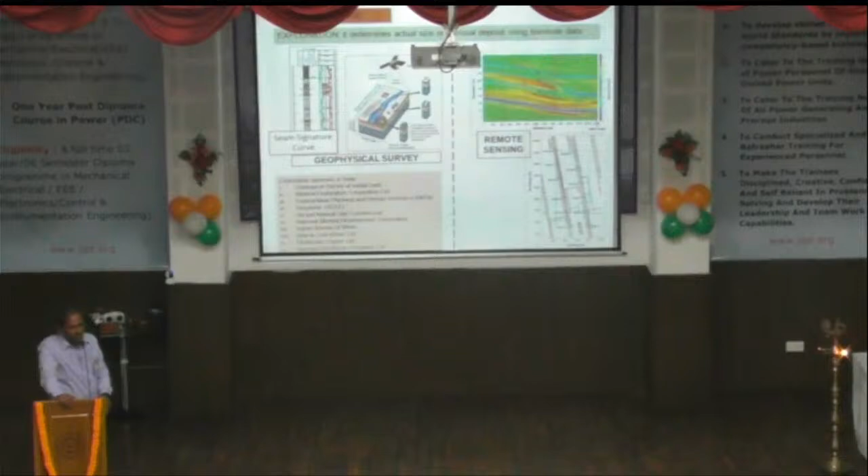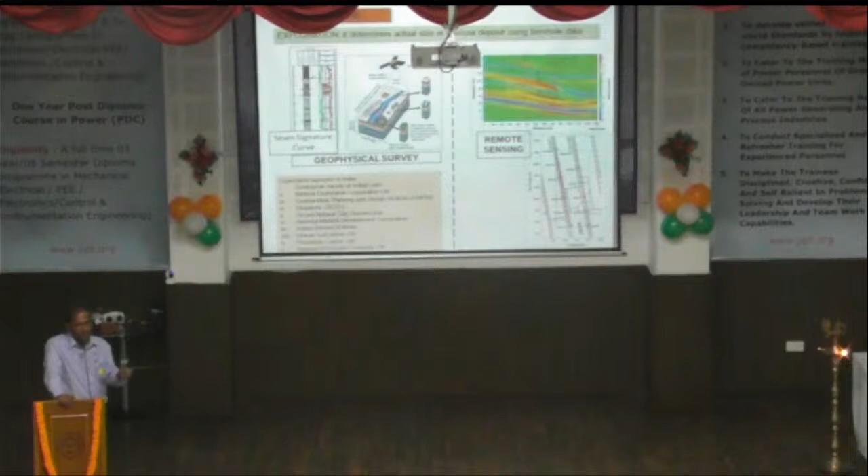So coming to this slide, the first thing is remote sensing, through which the potential of any mineral nearby or in an area is depicted or analyzed. After that, we go for full exploration, that is by borehole - we go for drilling, we remove the cores, and then we analyze the different cores to see what type of rock we are getting at what depth. I'll show some real pictures which we have taken recently at our mine.

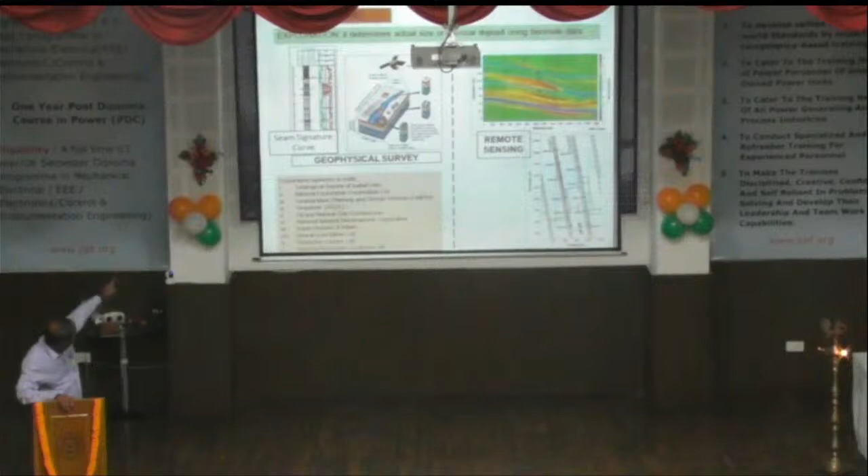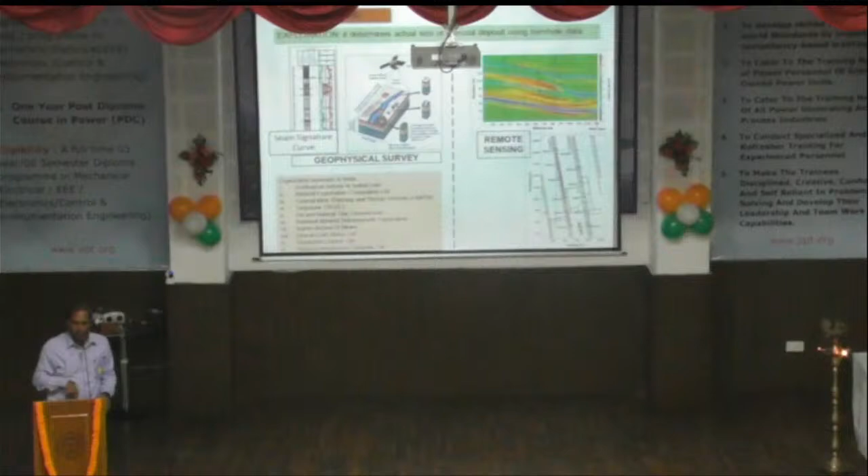This first thing, which I've called signature curve, is a modern technology where, just like our signature, with the geo probe, there are probes which we insert inside the bore hole, and we get the photograph, the geophysical and physico-mechanical properties of the rock through different lasers and other things, just like an X-ray inside the borehole.

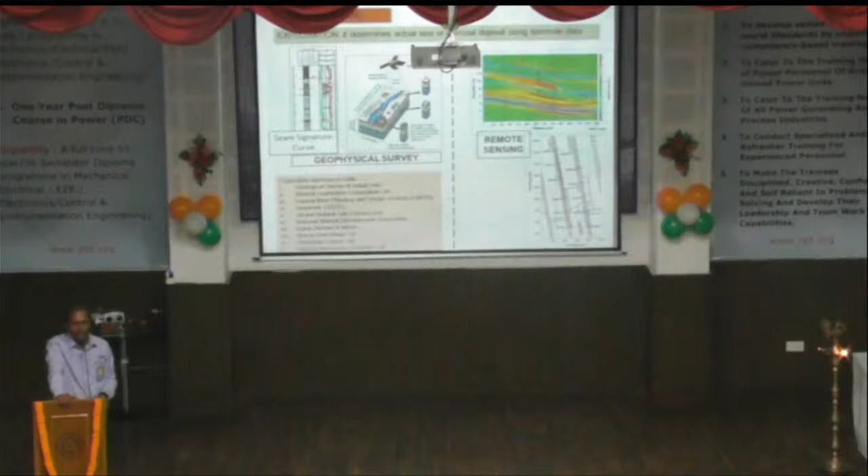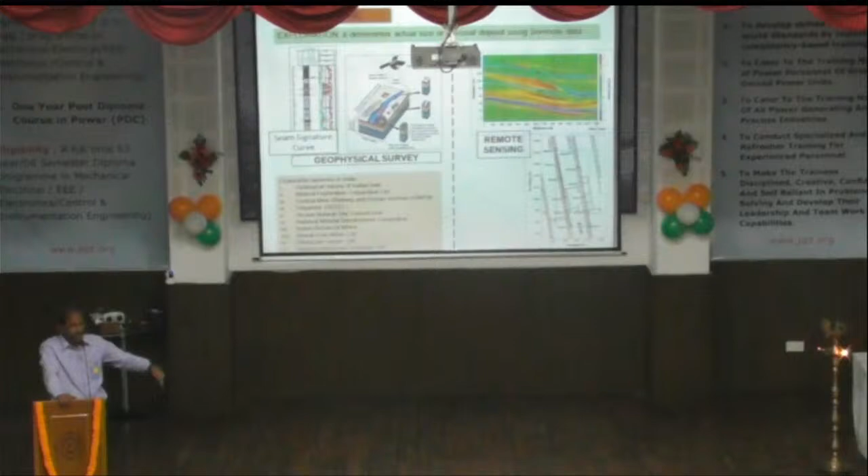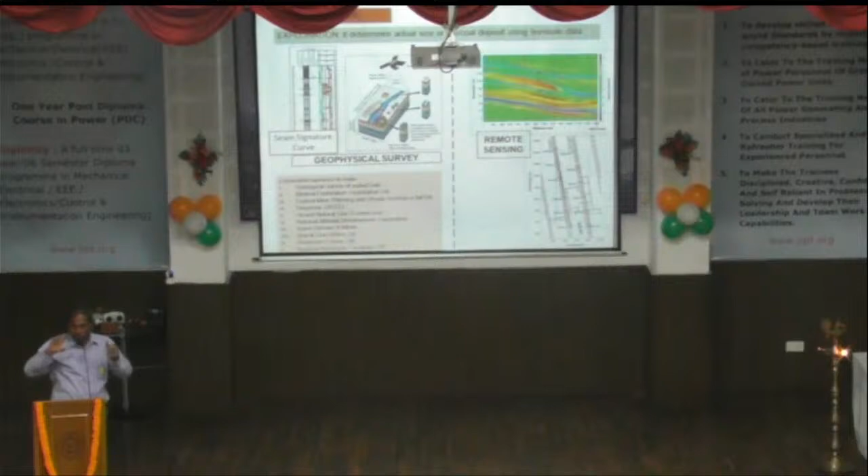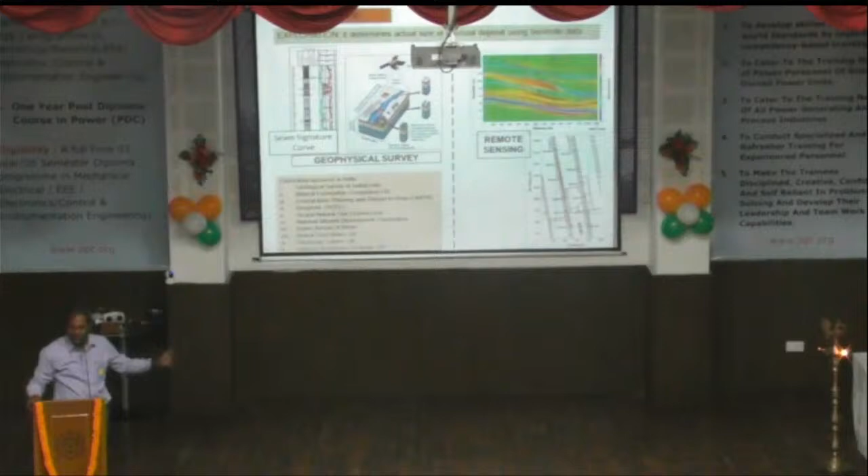When it is made like a graph, you will be astonished to know that different coal seams, different ore bodies, different strata has its own signature curve. So one can match whether the strata we are getting here at say 10-meter depth is the same 5 kilometers away at 100-meter depth or not. Otherwise, it is very difficult to know if the same strata, dipping say at 1 in 3 or 1 in 4 gradient, is there 500 meters or 1 kilometer away, or if it's a different strata. That's why this is a modern technology, and fortunately we are utilizing it at our Gare Palma IV/1 mines.

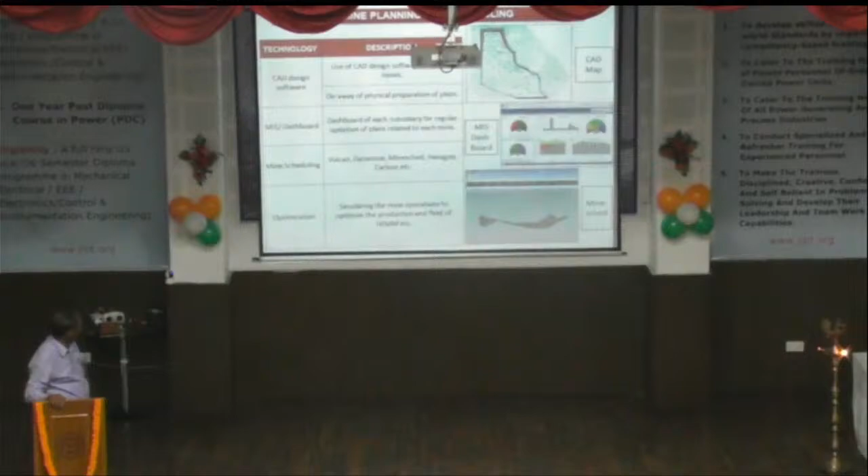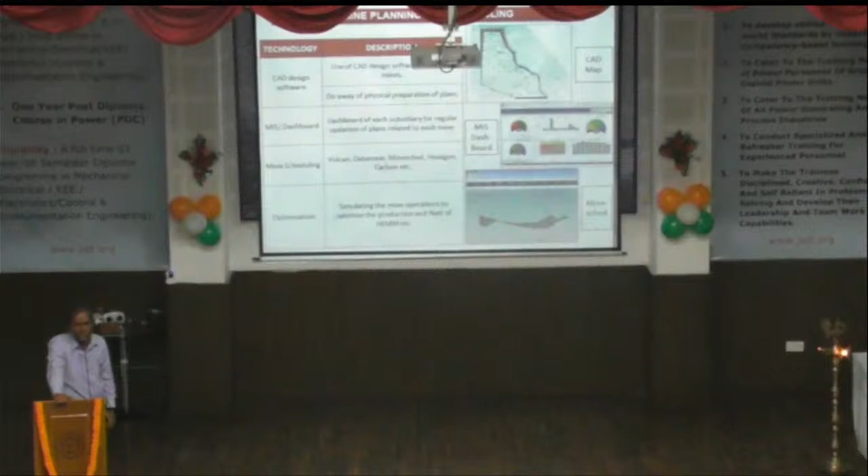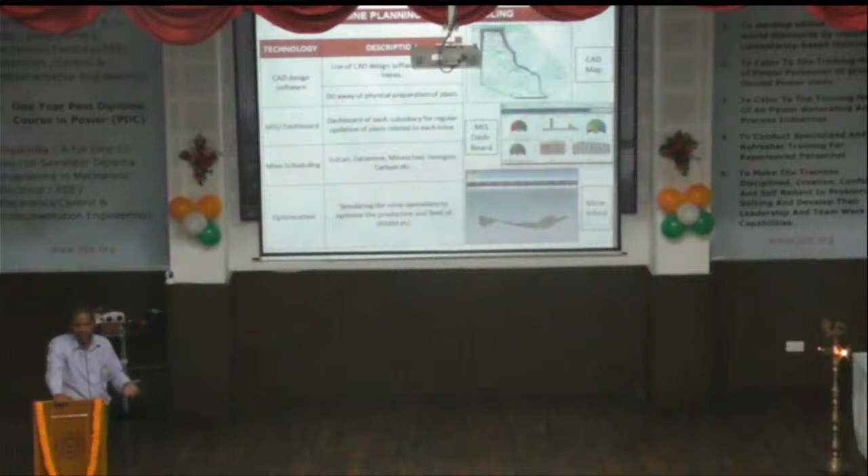Next. So these design software have come now, used for mine planning and scheduling. Earlier we used to invest a lot of time in drawing, and our surveyors, plotters and tracing persons were there for plotting. Such things must be happening in other areas also where projects are there, but in our case it was a day-to-day, regular affair.

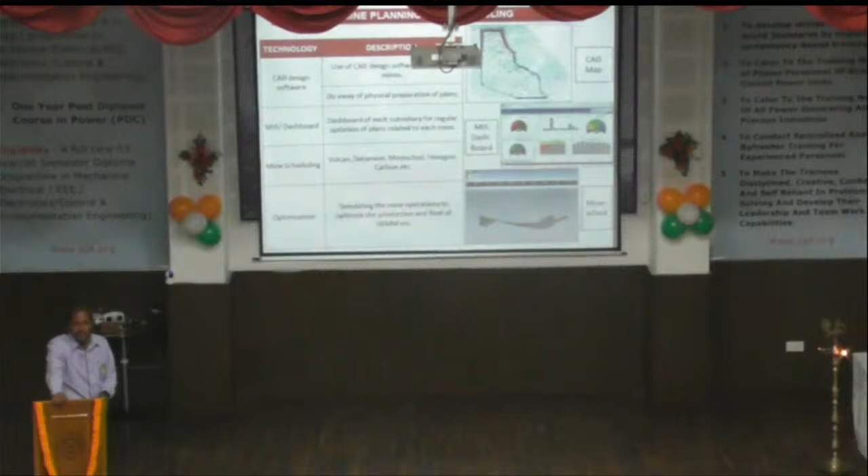You people must have heard about the Chasnala disaster, in which 374 persons died due to mine inundation, and based on that the Kala Patthar movie was made. It was because of a survey error.

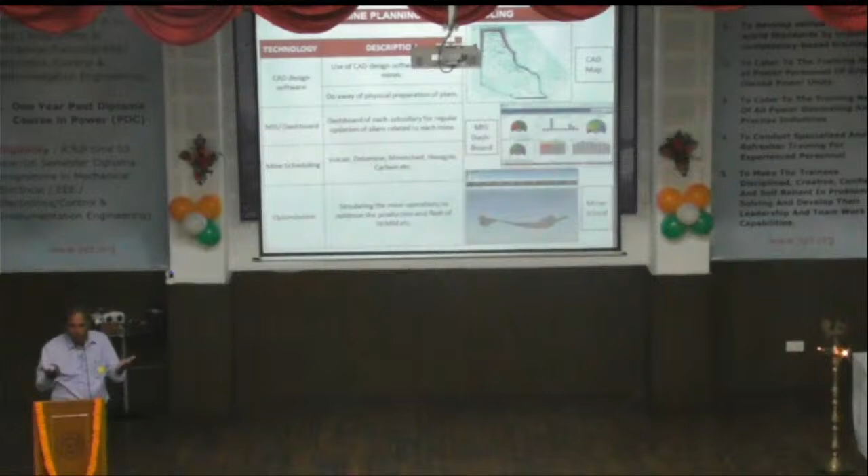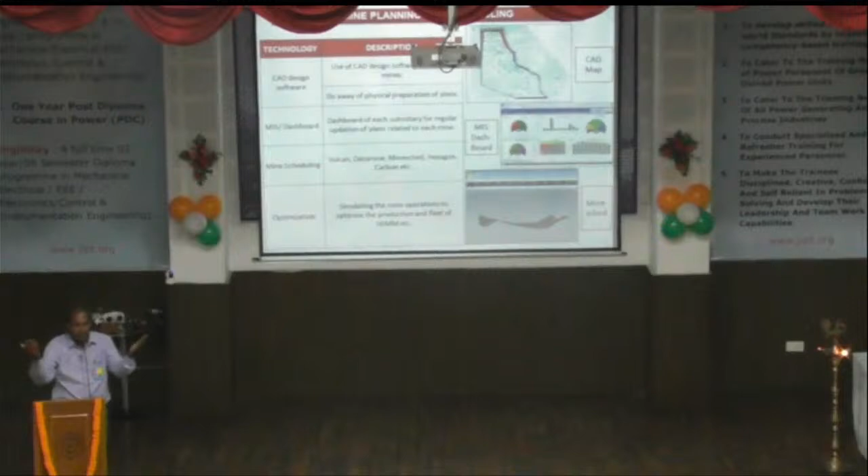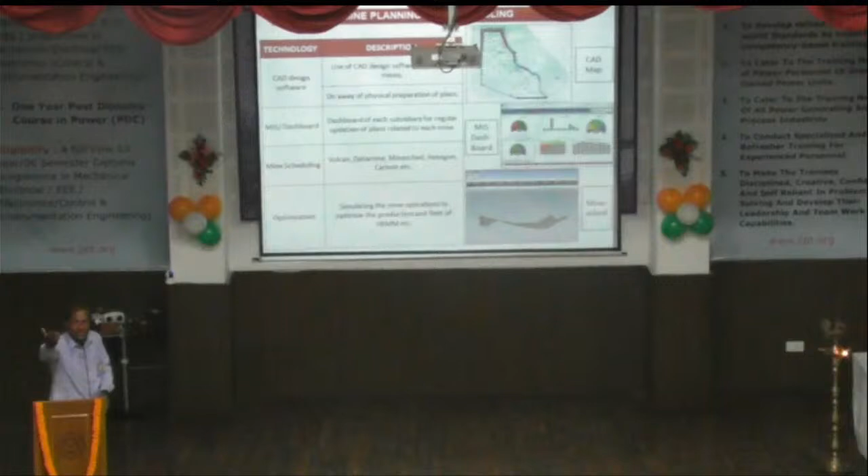Do you know what happened? At that time people used to trace on cloth, and that cloth got shrinked. After 30 years, if someone is mining there, this shrinking may reduce the scale, because the scale size used not to be written on it. So if an engineer working below ground estimates that water is 100 meters away, and due to shrinking error it has effectively become 50 meters or 30 meters, there are chances of deviation, and it may lead to disaster.

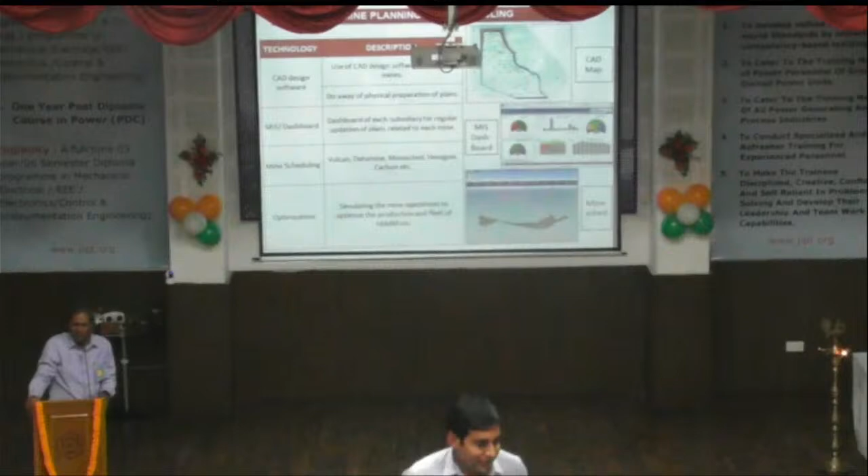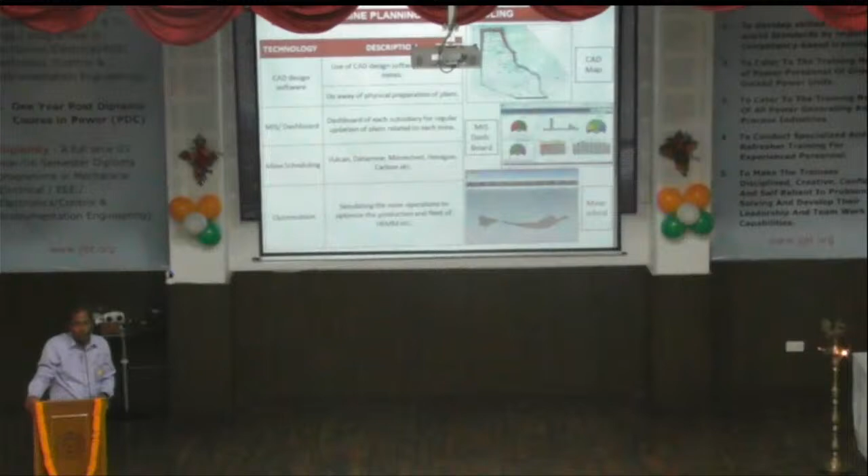Believe me, because mining is the most primitive industry, most of the industrial laws have originated from mine disasters - most of the industrial laws.

Next slide please. This is how mine planning and other things are done. I will not explain it in detail, otherwise you people will get bored. Next.

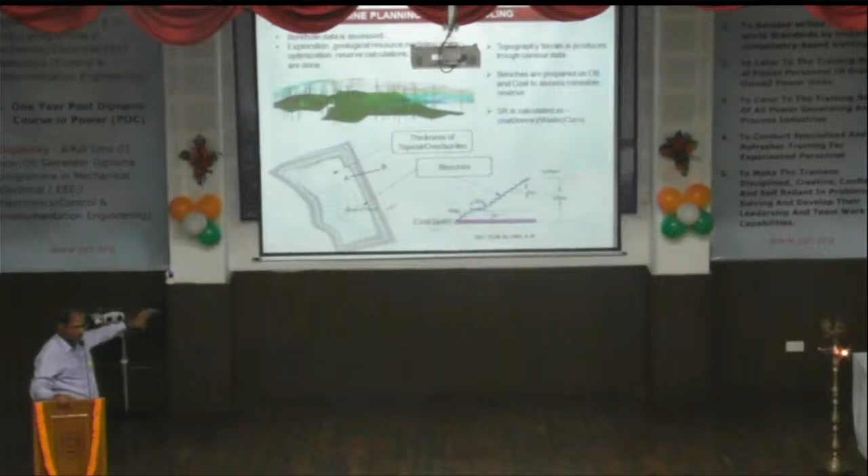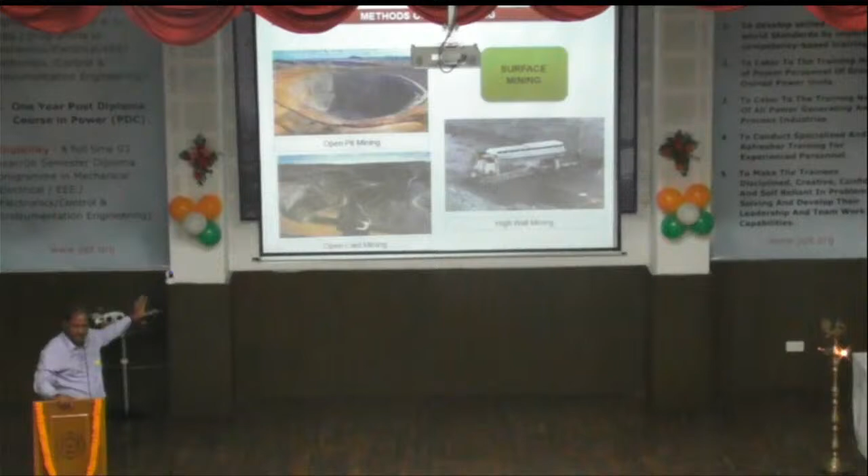These are some photographs of mining. Generally, open pit mining is a term used in metal mines, because there, whatever ore is present is not in a regular fashion - it is not a sedimentary deposit where the entire thing goes in layers. That's the reason such pits are formed.

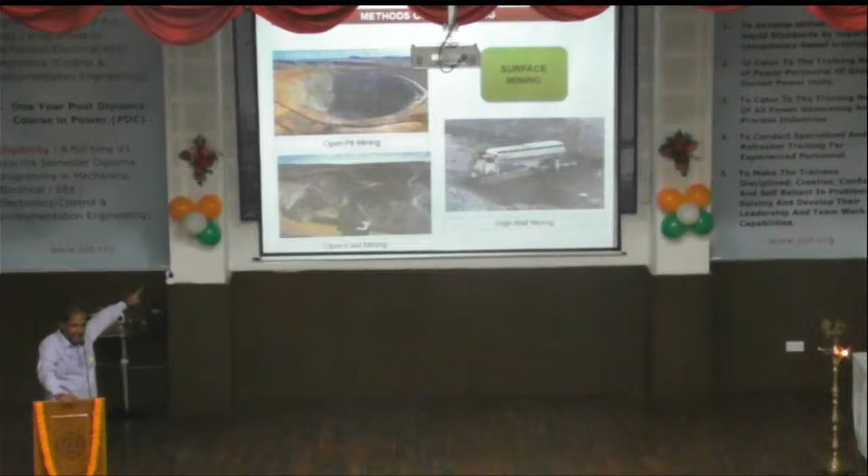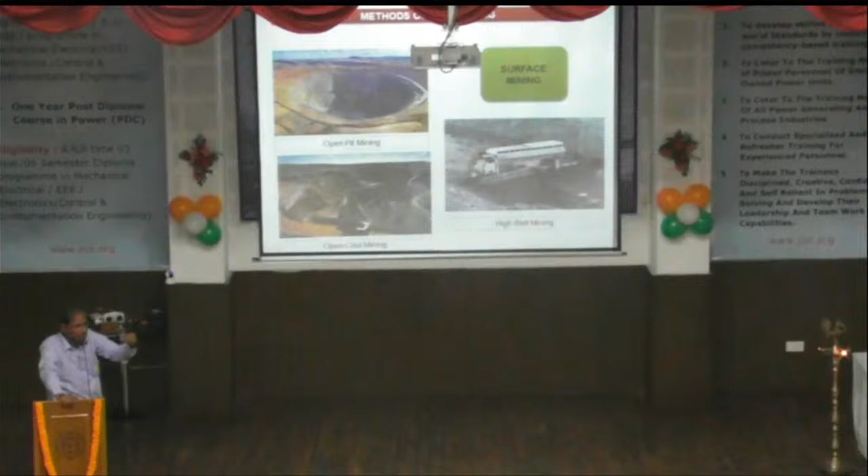Believe me, at the bottom of such a surface, air will not reach there. Many vehicles are running, so smoke will be there. There are mines in Chile, in USA, and in Australia where helicopters are used to clear the fumes inside the mine. So you can imagine what size these mines are.

Another is open cast mining, which we generally do in coal, where we remove the sedimentary deposit and then backfill it - we cast the overburden material backward.

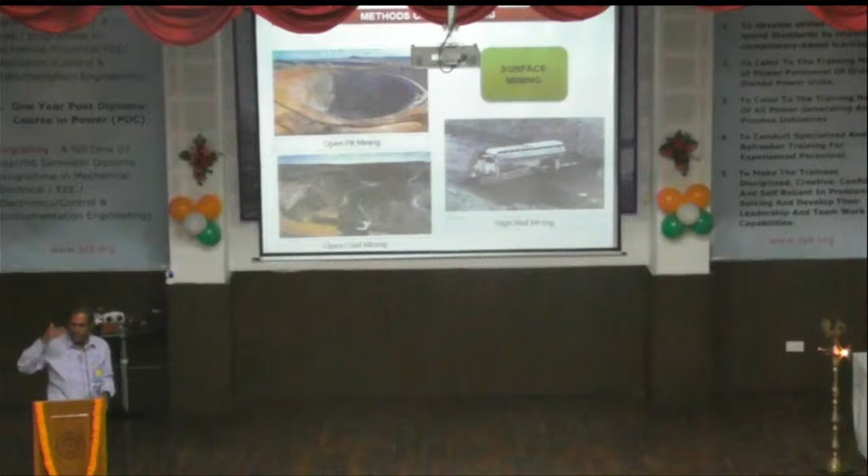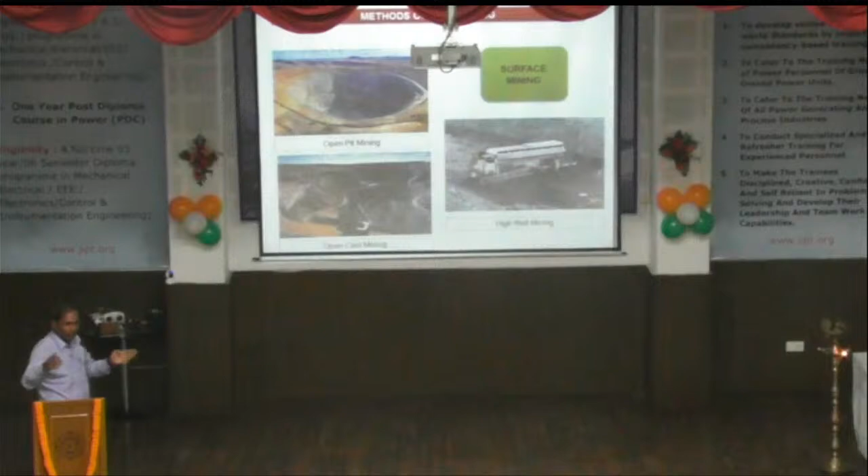Another is high wall mining. This is a new concept. High wall mining comes into play when open cast mining has reached its economic limit or break-even limit, beyond which open cast mining will not be beneficial. So at that time, or when two mines have come to the boundary from both sides, mineral gets locked in the barrier. To remove that locked mineral, high wall mining is used. High wall mining is done at the final pit limit boundary of the open cast mine.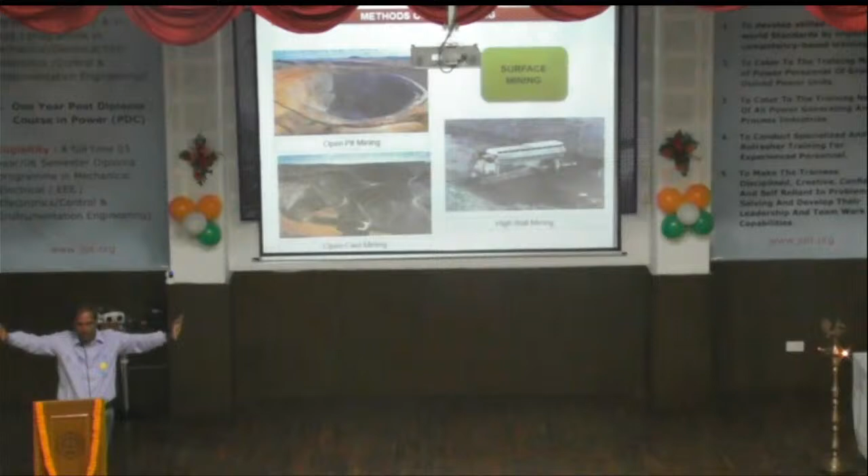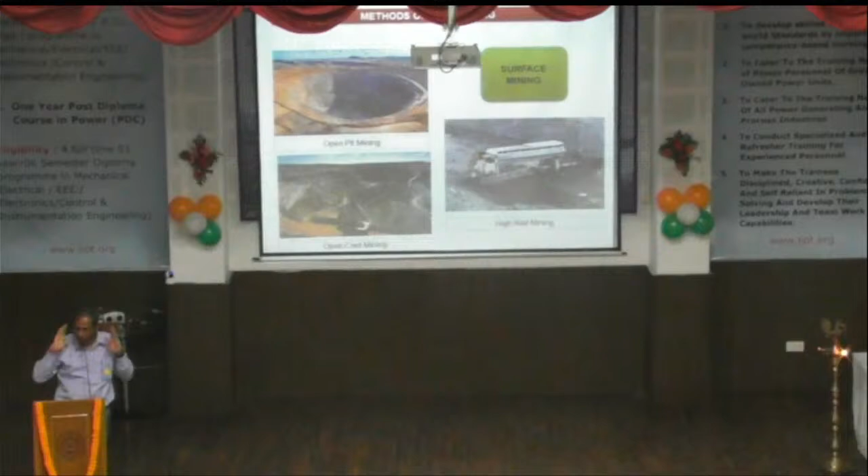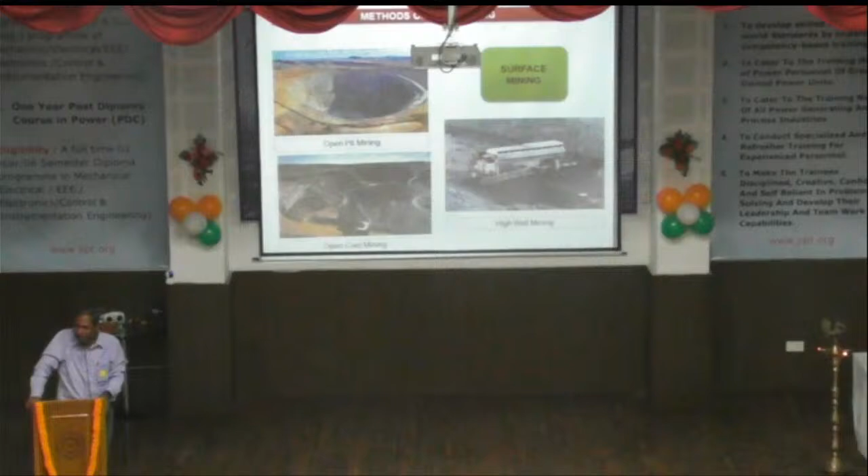At the open cast mine, the coal seam is already exposed. From there, we remotely operate the machine up to 300-400 meters - just like rat holes. We make holes, coal comes out, and no person goes inside. Up to 300 meters depth inside the coal seam, with the opening almost 4.5 to 4.8 meters wide and 3 to 3.5 meters high.

Okay, let's go for the next slide. Underground mining - I will not elaborate much, but I have worked in longwall mining for long, so that's the reason it is very close to my heart.

China is the largest producer, largest consumer, and largest importer of coal in the world. They produce to the tune of 3.7 billion tons of coal. We are aspiring to reach 1 billion tons somewhere in 2024-25. So we are far behind them, and we are working only with open cast.

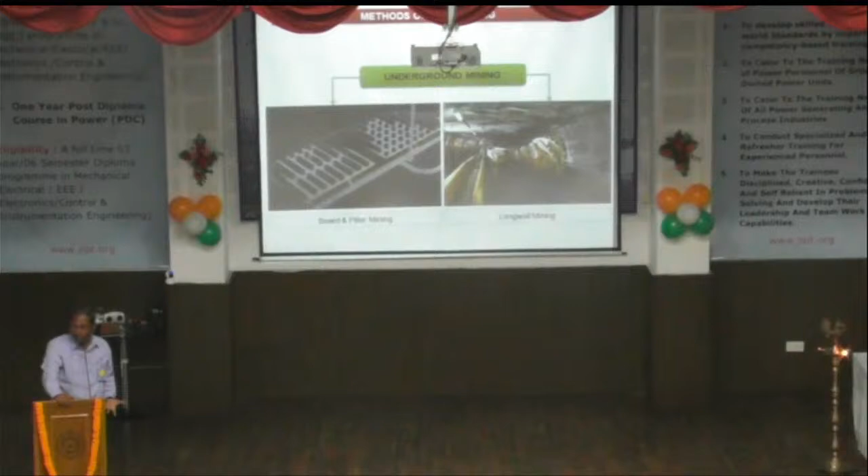Whereas in Chinese coal, almost 90% contribution is by this technology called longwall mining. It is the safest underground mining technology, and there are mines producing more than 10 million tons of coal per annum from underground. Although their deposits are also good, the reason behind that is they have technological support.

In 1975, they purchased 11 longwalls from Germany. Out of 11 longwalls, 10 they deployed inside the mine, and one they used in their industry to work on reverse engineering. They opened the entire machine part by part and called the entire industrial fraternity asking them what part they could make, telling them to make that and they would import the rest.

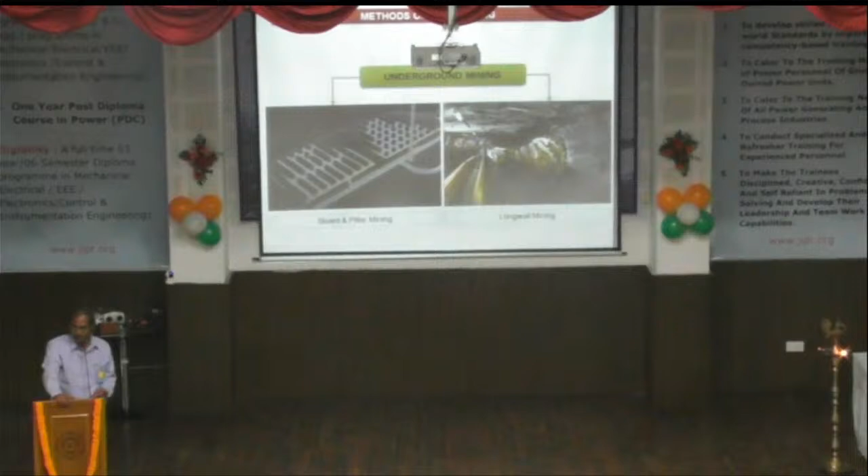And Eickhoff shearer they imported from Germany. Now they are selling this shearer technology to the world.

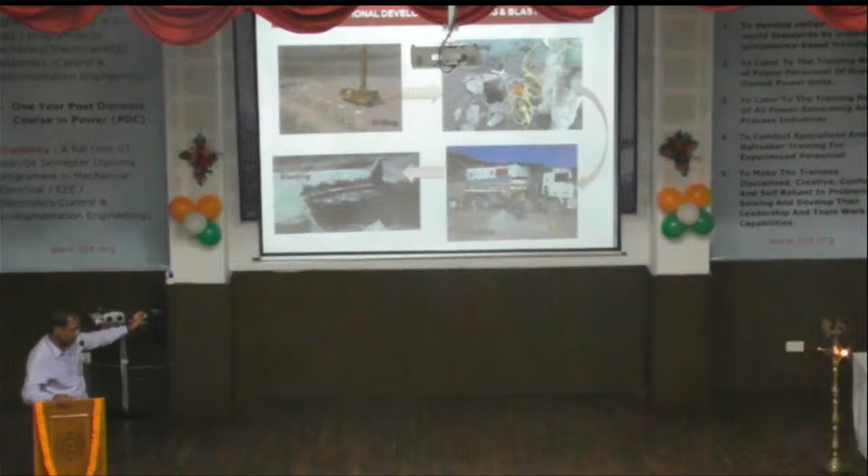Conventional development first starts after exploration and planning. Next is drilling. Actual production comes from drilling and blasting. So we first drill, then prime, then charge with explosives, and then blast. We are the largest user of industrial grade explosives, we meaning India.

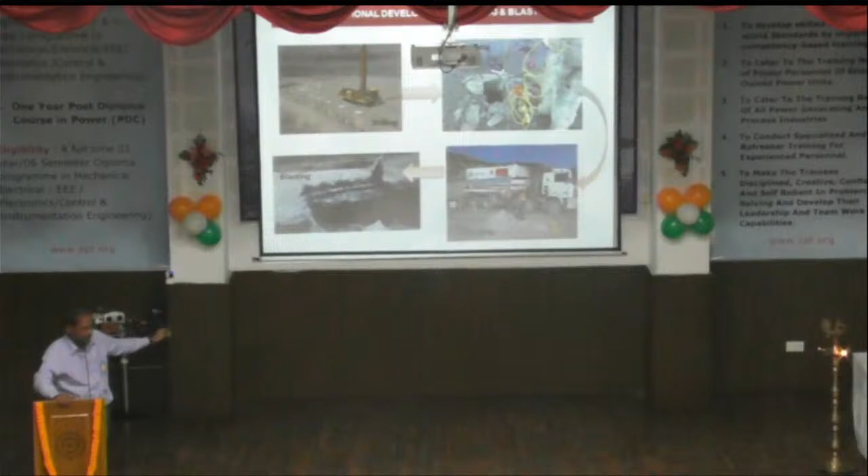In China, in fact, they are going with cutting technology, which is a non-blasting technique. Transportation out is a main bottleneck because power plant people are sitting here.

They understand the logistics where, in fact, we are missing the line which needs to be connected to bring coal from mine to our plant. Mines are a localized industry, wherever you find mineral, only there can you mine. A mine cannot be opened anywhere. That's the problem with the industry, and that's why we need a lot of logistical support to bring coal or any ore to our plant.

The other day I was listening to our ED sir. He was telling about how power plants should be near mines. That concept later came to the government also, which is thinking it's better to transport power to different places than to transport coal.

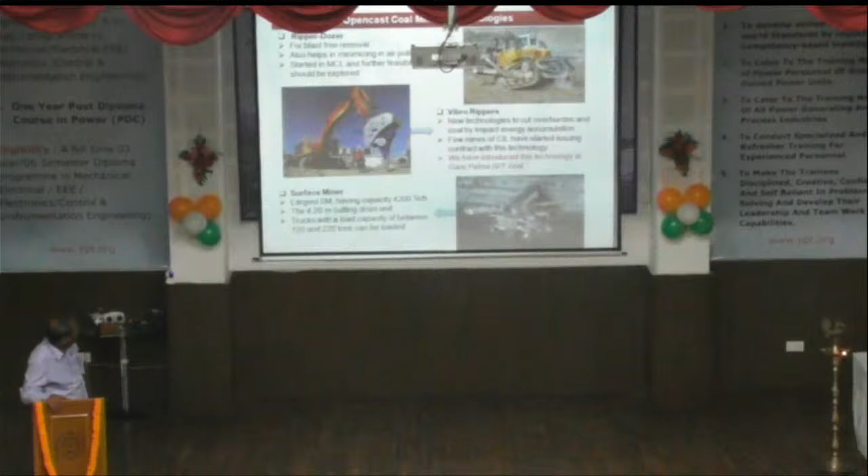Next please. These are the open cast mining technologies where we are not going for blasting. Ripper dozer - you can see that dozer having a ripper in the backside. Vibro ripper, with excavator having vibro ripping arrangement.

And then surface miner. Fortunately we have the largest surface miner in the world in one of our mines in Mozambique, the Vulcan mine, which now the JSPL group is owning. We have a 4200 surface miner machine with a production capacity of more than 5,000 tons per hour. It directly loads to 150 ton dumpers, not below that, otherwise it will be inefficient, and it cuts a depth of 80 centimeters in a go, with 4.2 meter width, 80 centimeter depth coal cutting and directly loading. It does not require any loader. In fact, the photograph is there.

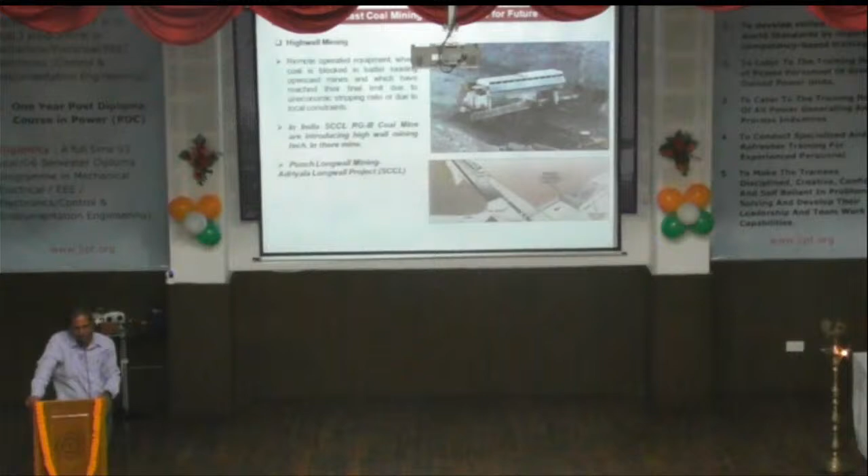Next please. High wall mining, I have already explained. The below photograph is one example. In fact the project was conceptualized by Australians, and Australians have worked some mines using what is called punch longwall or punch entry longwall. I'm happy to say I was associated with the first punch longwall project in India, and the first punch entry, in fact, was made by me and my team. Mr. Veera Reddy, who is the DT Coal India now, was the project head and I was the site head. So this is the thing: from the open cast mine, from the pit limit, wherever coal is exposed, from there you make the entry directly.

What happens in underground mines? We have to do tunneling from top to reach coal. When coal is already exposed in the open cast, why not use that? Directly we can enter - from the first day, revenue generation will be there, you will get coal. Whereas for tunneling, for reaching the coal, you need to work hard, maybe 1 in 6, 1 in 7, 1 in 10 gradient. For reaching 50 meter depth, you have to make a tunnel of minimum 500 meters, and that too in stone. So that can be avoided. The first project in India is the Adriyala Longwall Project, which is working well - it is a 3 million ton underground mine with a single longwall.

Alternate fuel technology, like LNG and other things, is being tried nowadays because fuel is the number one cost in mining. So we need to work out how we can replace it - hydrogen fuel is also coming.

Next please. Bucket wheel excavator, I've explained. Dragline is one thing where, in fact, a 32 to 43 cubic meter, up to 60 cubic meter bucket size OB will be directly loaded, and then dumped behind in the decoaled area, 100 to 130 meters away. So loading as well as hauling is done by this. This is the biggest machine available in any mining area, and you will be astonished to know that its weight is more than 1200 to 1500 tons, and it walks - it does not crawl. Walking dragline.

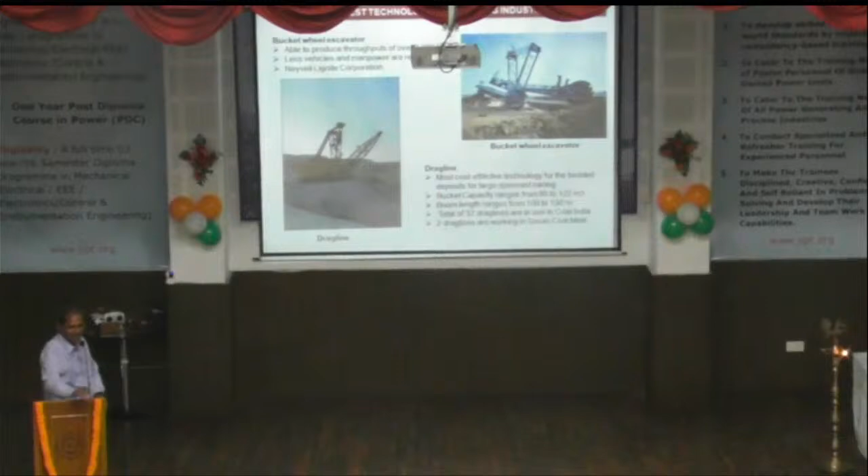It walks. And sir was telling - sir has seen the motor and everything, electrical, everything. It is just like a workshop or just like a plant inside.

So these are the dumpers. Drill is also important. 311 mm drill is nowadays applicable in deep mines, where if you see dragline benches which I have talked about, can someone imagine how much depth of hole we make?

Any imagination for dragline working? My mining people, tell me, are there any mining friends here? In fact, we drill holes of more than 40 meters, and number of holes, say 100 holes, we are blasting at a time. Weekly blast is done. So just imagine, 40 meter, 30 meter depth hole, 311 dia, and then blasting at a go. Huge quantity of explosive is used, and it is real class engineering.

All sorts of it is judging the strata. You need to understand, is there any cracks? Is there any chances of problems? So many things are there, I will not elaborate that. Next please, sandwich high angle conveyor.

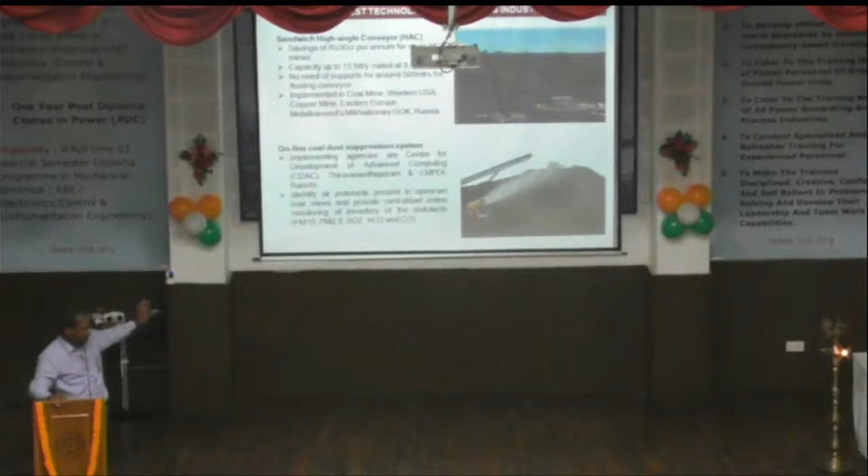Almost 13 million tons of coal is being transported in USA through this HAC. This is also coming, we need to bring this technology to India. People are contacting us, wherever you can give us the pilot project also, sir. Can you imagine a belt which can work in C profile, which can work in J profile, a single belt taking coal from here, transporting vertically, and then going back. One cannot think about a single belt doing this, but this technology is doing this. Here, anything beyond 70-degree inclination can also work. So this is the future technology, and it is being used in USA and other countries.

Online coal dust suppression system, these are being developed so that we can understand wherever dust requires suppression, and it is being connected with automated dust water sprinklers, so that wherever dust generation is more, with the help of logic, it will automatically actuate the valve and water will be sprinkled.

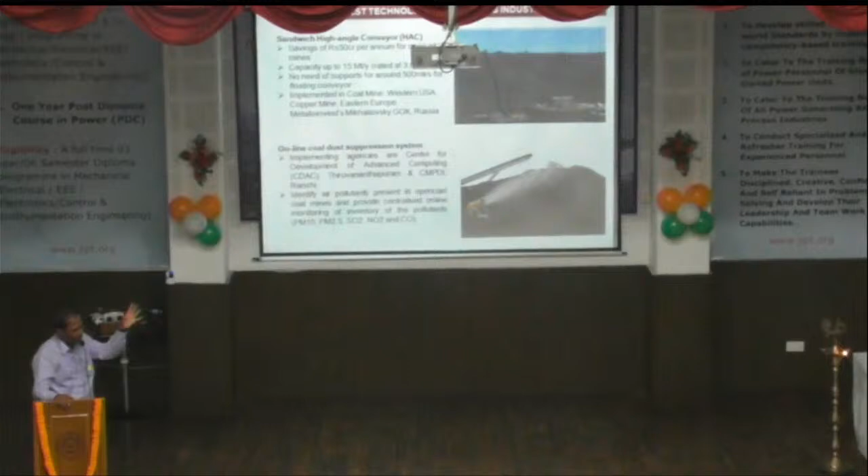Next please, I am taking slightly more time. I understand you people will get bored, but I think many of you must be thinking that something new. So next please, digital twins, these are the future thing which are being used. What was the last slide, please?

This thing, missed, volume analyzer. So such technology has come for use at the time of loading as well as for loaded equipment. When dumpers are loaded, the volume analyzer can analyze how much quantity the excavator or shovel has loaded in the dumper, and how much the dumper is carrying. Although there is a weighment system with different load cells, through which in the cabin of the dumper you can know the tonnage, the operator can know. But there is always a mismatch between what the operator is carrying and what the shovel operator is loading. So this can give a correction that some more quantity of ore or coal can be loaded. So that is one thing.

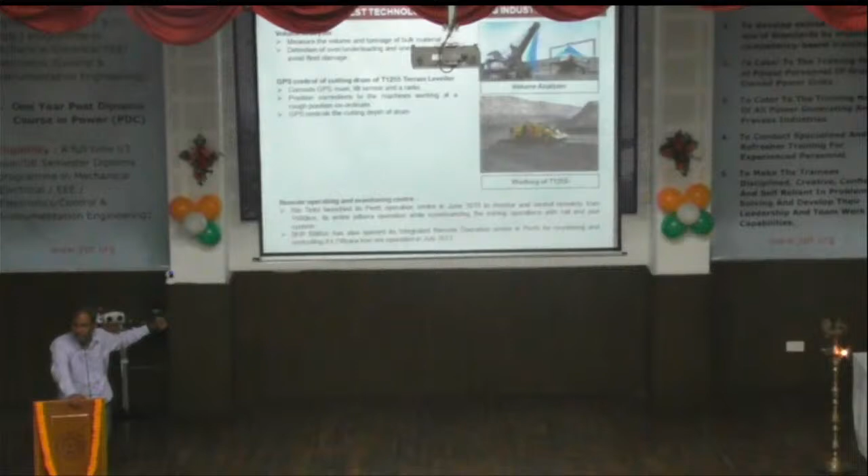Another is GPS control cutting drum, terrain leveler. This is being tried in Indian mining conditions. This is also similar to surface miner. Here, depth of cut is almost 80 centimeter, 60 centimeter, and it can cut up to 80 megapascal of compressive strength of rock. Coal strength, can someone guess? In Indian coal, what is the compressive strength of the coal? Can someone guess? It is around 30 megapascal or below that. This machine can cut up to 80 megapascal, and in some machines it can cut up to 120 megapascals also. So it is very useful where you cannot go for blasting.

Remote operating monitoring center. In 2010, Pilbara mine, a very big iron ore reserve in Australia, from there the entire mining is done, and it goes to Perth. Perth is almost 1,500 kilometers from Pilbara, and can you believe entire mine is operated from Perth? Entire mine is operated from Perth.

They have the control and command center from where they decide which machine will be deployed where and how much production can be done. All machines are autonomous. They started the pilot project in 2010, and by 2016 they had 80 dumpers of Komatsu which are completely autonomous. They have more than 40 fleets of railway network, railway engines or rakes, out of which 40%, 50% they have already made autonomous. Meaning 1500 kilometers of railway network without an operator. They have gone to that level.

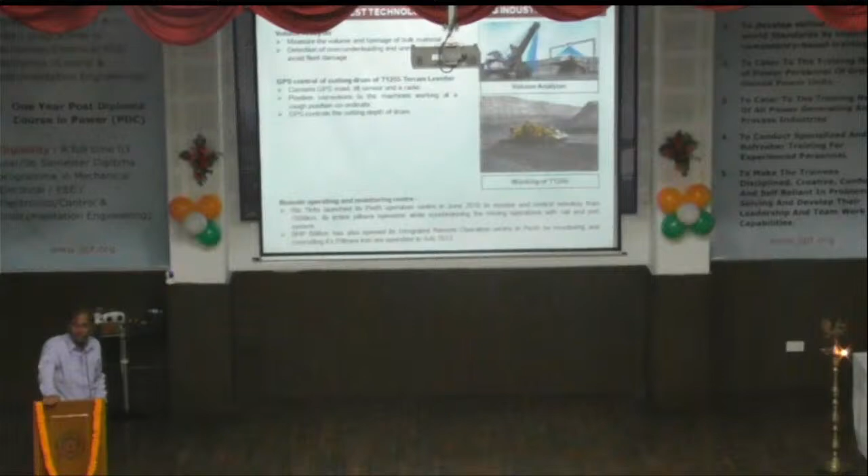Although in India it is not required, I think, because we are a populous country and it is not like fly in and fly out. In Australia, the fly in fly out concept is there because most of the population is near the seaport. So generally weekly people, there will be a flight to the mining site, then 1 week operation, 1 week at your house.

In 2017, World Economic Forum and Accenture estimated that there is a potential benefit for the mining industry if we apply digital twin concept, that is AI and machine learning, in mining. Then 9% of the industry's profit will improve. That is the study, so it is under process. Innovation is on the way.

Advanced GPS system, this is global navigation satellite system. In fact, there was a call from Ministry of Environment and Forest to me saying sir, there are hot spots in your mine, please control the fire. Direct from Delhi, a phone call came to the mine operator saying there are places in your mine where hot spots are there. What does it mean? It means satellite technology has improved so much that it can detect hot spots on earth precisely, and they can definitely tell which mine is having burning coal.

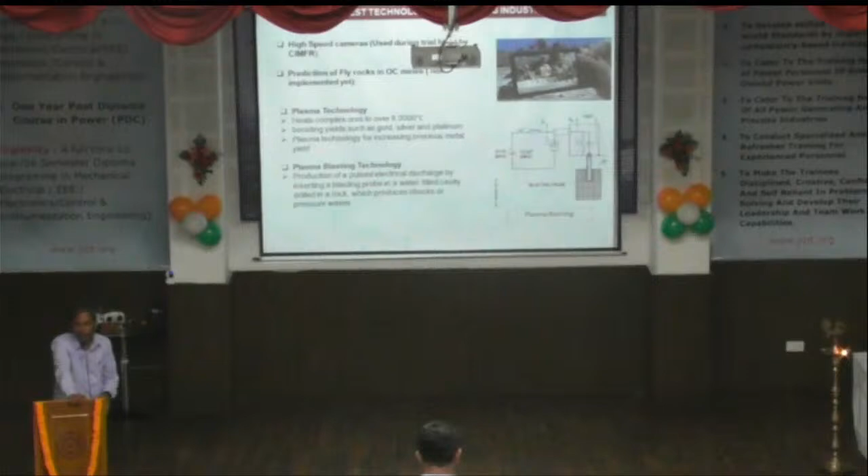High-speed cameras. Way back in 1997, I remember on GT Road near Asansol, this 4-lane highway, National Highway number 2, was being made, and there was an old bridge which needed to be demolished. I was fortunate to be associated with CIMFR as a senior research fellow at that time. We used high-speed cameras taking 200 frames per second, even 2000 frames per second, to understand precisely how the blasting was done.

Just as you saw the tower being demolished in Delhi recently, it was big news. Such towers have been demolished in Balco also. Earlier a chimney was demolished. Many demolition blastings in India have been done by our own engineers, and behind that twin tower demolition too, many mining engineers worked, mainly those expert in blasting, hired from CIMFR and other places.

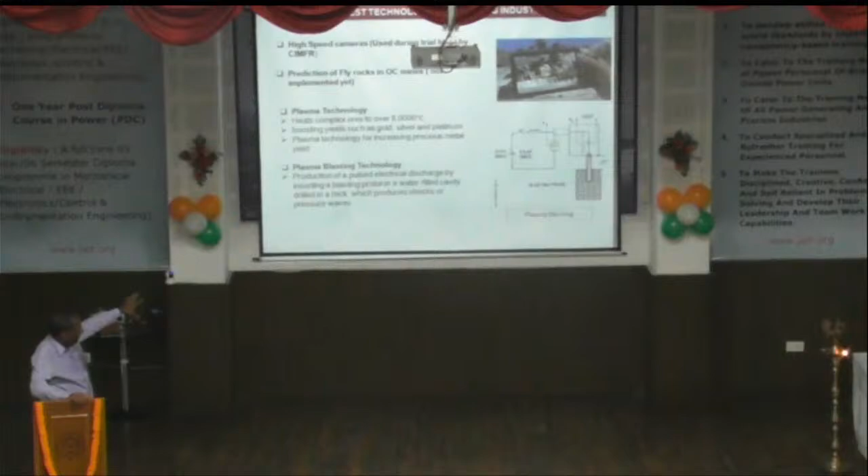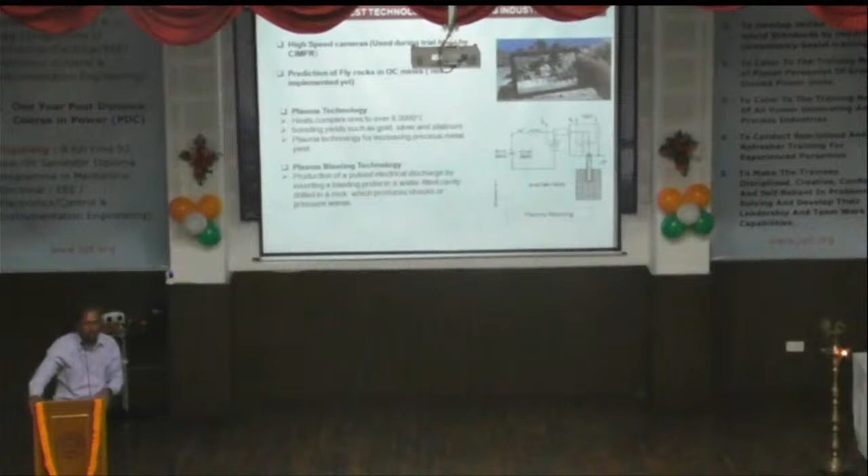Plasma technology is also one thing coming up next. A borehole is made and water is put into it, and high intensity electricity is passed through the water, creating a shock wave which fractures the rock. This technology is useful near villages or near structures of historical importance.

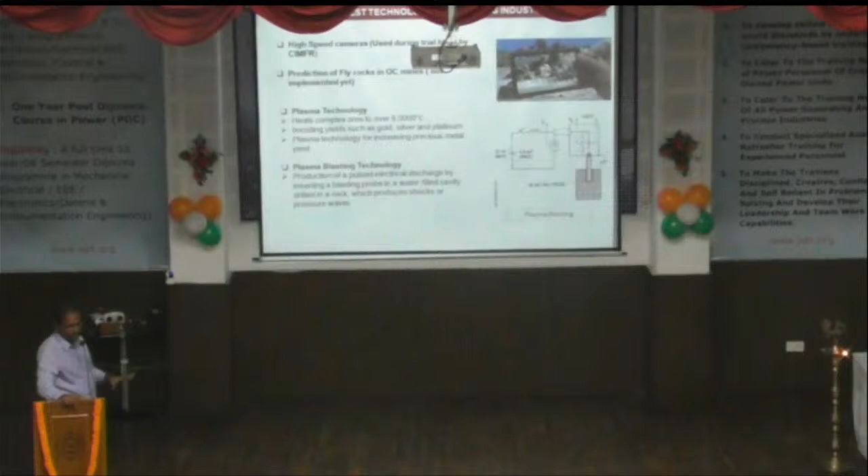Another application of plasma technology is for removing complex material from tailings, where rare material like silver, gold, or copper needs to be extracted. With plasma technology you can increase temperature up to 8,000 degrees centigrade, and based on the fractional melting points of different metals, they can be segregated.

Bacteria leaching is a new concept for copper. Vale, a Brazil-based company, is trying this in collaboration with the University of Sao Paulo in Brazil.

Wireless blasting is also being utilized, because traditional blasting requires a cable to be laid and then you take shelter maybe 100 meters away from the site. This wireless technology in blasting has now come, and Hindustan Zinc is trying it and may implement it within a week or so.

This is OITDS, Operator Independent Truck Dispatching System, which is very old technology in India but is not yet successful due to our own lackluster approach. However, it is a very good technology in which you can observe real-time data directly, take action without human intervention, and even monitor diesel and other consumables. The behavioral aspect of drivers and operators can be monitored, and the safety aspect can also be monitored.

This is clean coal technology, JSPL is a pioneer in surface coal gasification at Angul. This is one of the things talked about across India. Coal India, after the success of this project, is going to invest 25,000 crores in 6 of their projects. Recently our chairman hosted IAS officers on probation, and the entire IAS batch came to Angul and JSPL Angul to see this project. Sustainability is important. Coal-bed methane pilot projects are also being done at different places where methane is more in the coal seam.

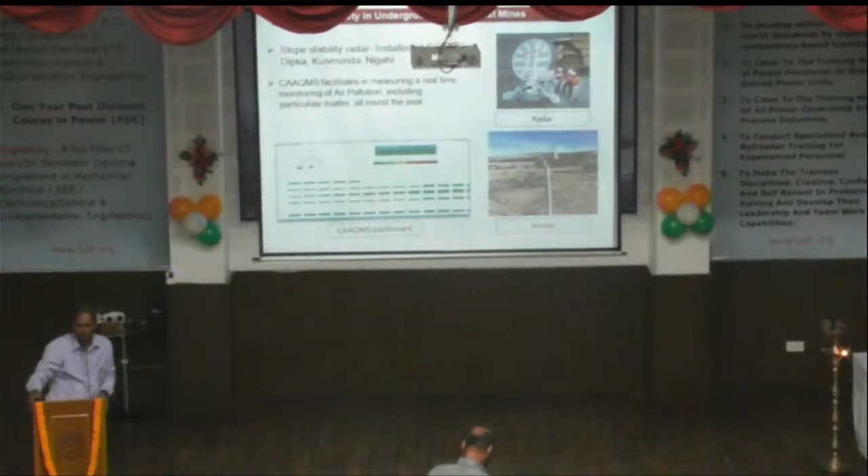Drones are being used, and this is used in our mines also. A drone can very well show the profiles where fractures are there. You can run the drone along the mine bench and it can detect wherever fractures are there, so that you can design your blast accordingly. Otherwise, when you do blasting, fly-off rocks will be more through the fractures, leading to dangerous operations or accidents in the mine. If it is very massive, boulders will be formed, making it difficult to load, and then you have to go for secondary blasting, which is again a dangerous operation.

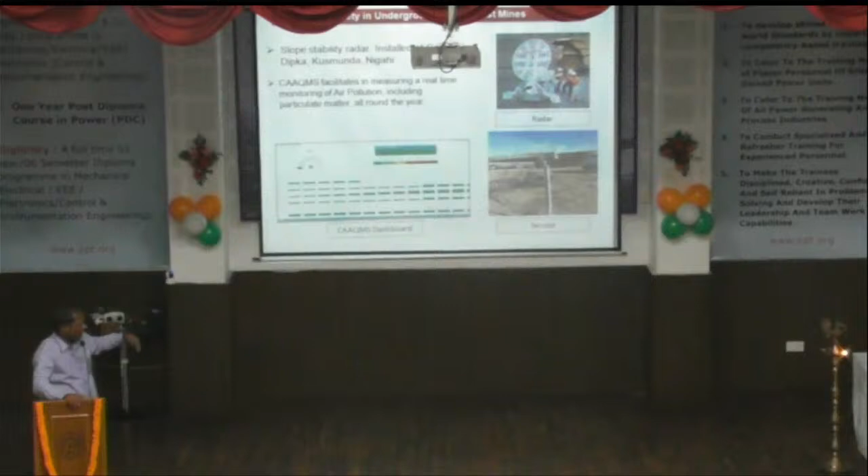Other than that, drones are used for survey and other things. 3D laser radars are also there to understand the stability of slopes, because a slope does not fail overnight - it takes overburden dump slopes years to fail. It may be 1 mm movement in a month, and that slowly leads to the failure zone. So these things can be monitored through 3D laser sensors.

Remote sensing, I have already explained. Dust suppression, digital mine safety, geotextile - these are now old things.

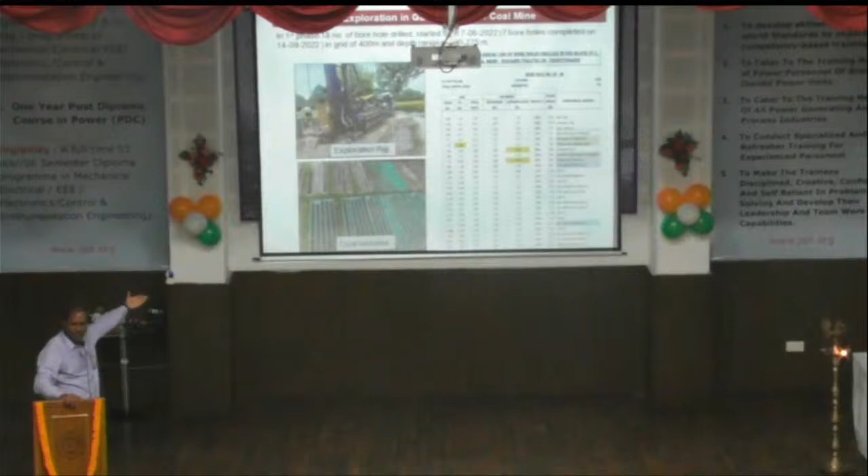Gare Palma - this is the exploration we are doing to understand if there is any coal below our existing operation. This we are doing in the conventional way: core samples are collected and then analyzed in the lab.

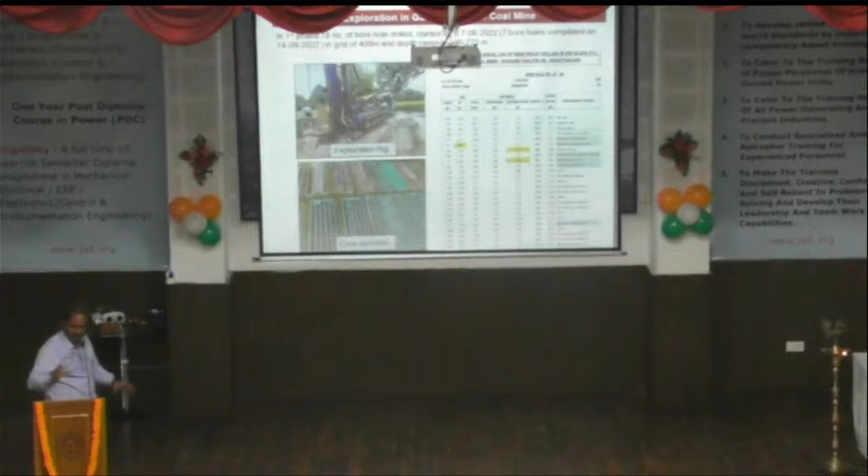This is what I explained in the beginning - signature curves we are doing to analyze.

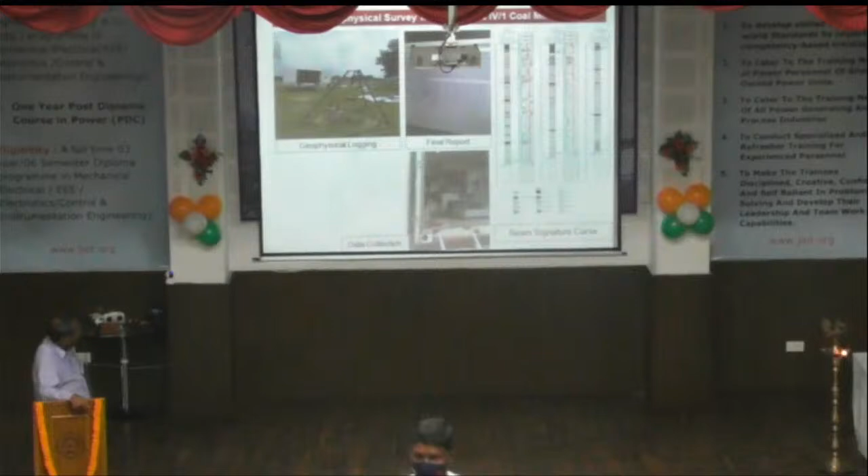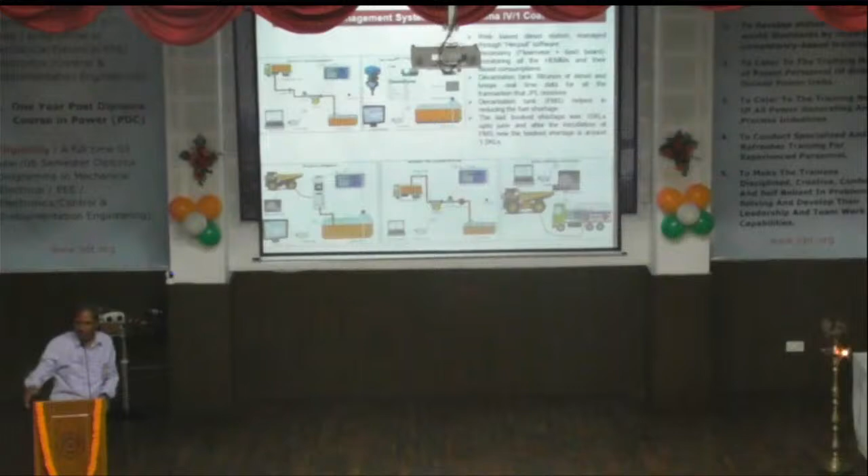Fuel management system - we have already made it, using decantation. Everything will be monitored online. We have a dashboard through which we can know which dumper has been fed how much diesel, and which contractor has taken how much diesel, through this fuel management system. This is already installed in our mines.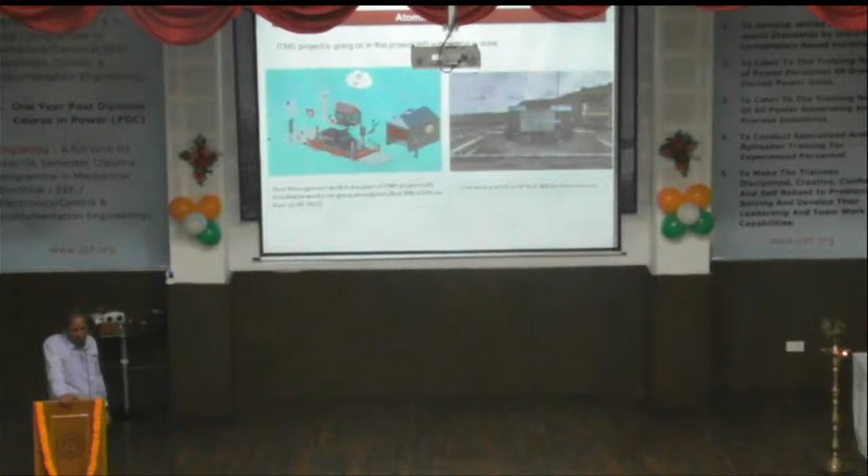This ITMS project is similar to ITDS, which we are going to take up. It is an RFID and GPS based system. We are going to commission it in maybe another one month's time.

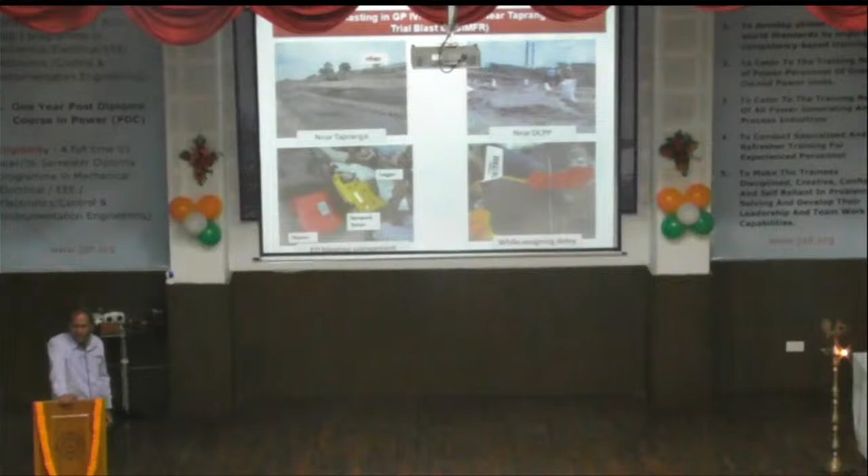Electronic blasting detonators - we have also used these in the mine, which is very near to a village, very near to DCPP. I think Mr. Arupalji was kind enough, I don't know where he is.

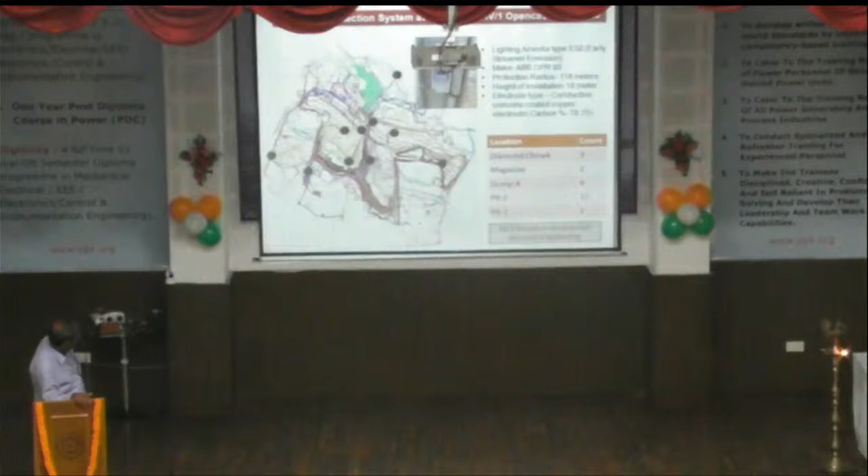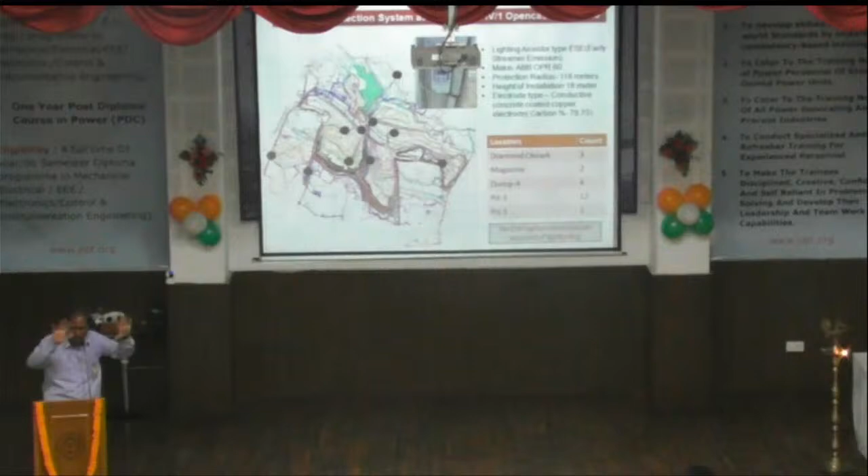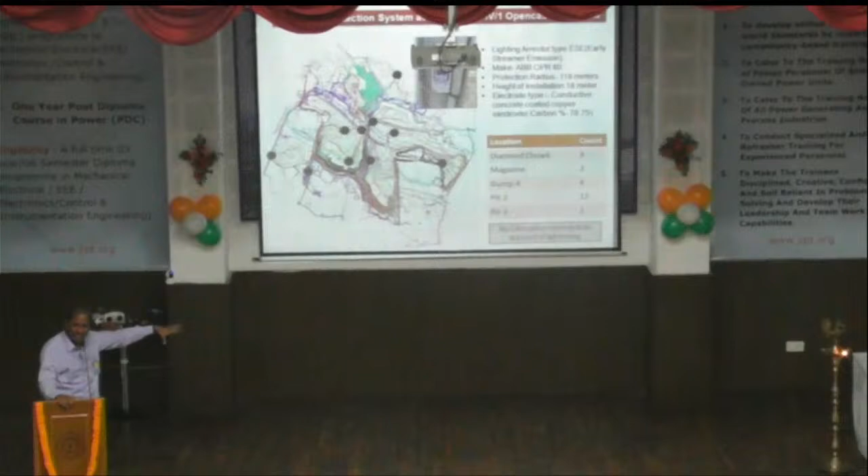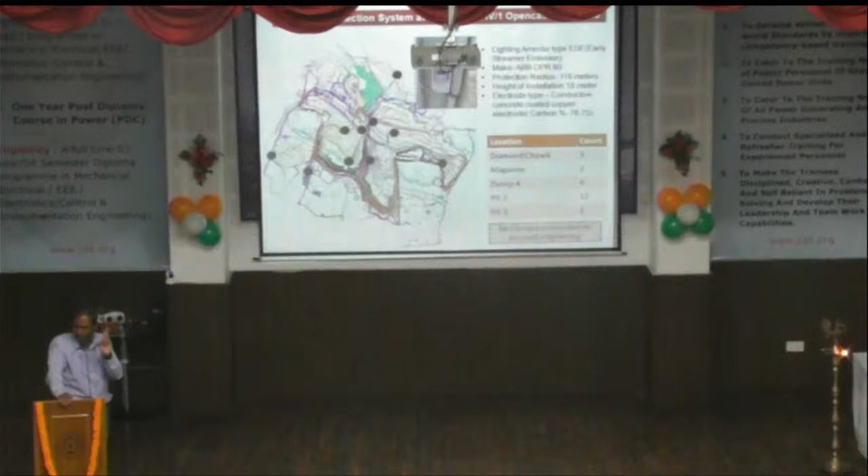This is, in fact, the lightning protection system which we have established in the mine at different locations wherever we work, or wherever there are some structures. You can see the locations where we have encountered so many lightning incidences inside the mine. Fortunately, thanks to our team, we have located the lightning arrestor in such a way that there was not even a single mishap of electrical tripping or weighbridge getting disconnected due to lightning. Although you can see how many records, on record, such lightning strikes were there.

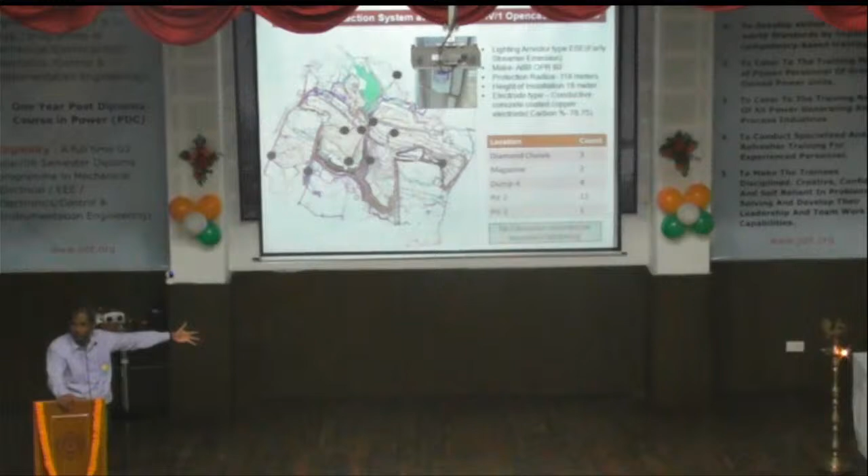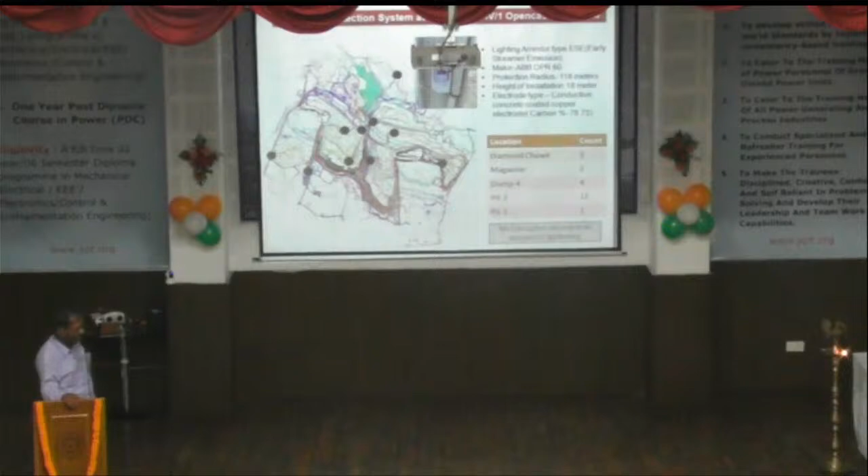In pit 1, there were 12 lightning strikes, where our 10 pumps are running as of now, people are gathered there only. Even then there was no mishap or electrical cutoff due to this, so no disruption was recorded.

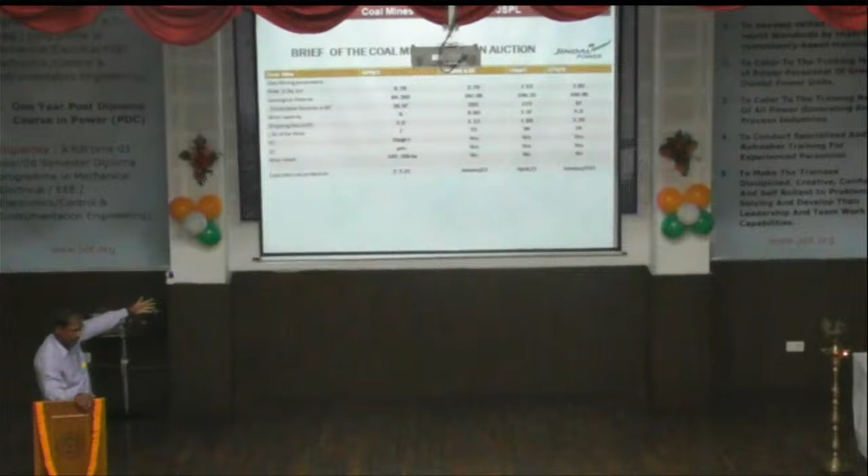So these are the coal mines which we have acquired: Gare Palma 4x1, Utkal B1, B2, Utkal C, Gare Palma 4x6, and the bottom line is the date on which we are going to start it. If you see the mine capacity, 6 million ton is 4x1, 8 million ton is B1 and B2, 3.37 million ton is Utkal C, and 4 million ton is Gare Palma 4x6. So 4 mines we are going to start soon.

These are the sustainability aspects of mining. Last time when our ED sir came to our mine, he told us to go for solar panels on our dumps. We are aspiring to do this once we reach the final height of the dump. We'll do this.